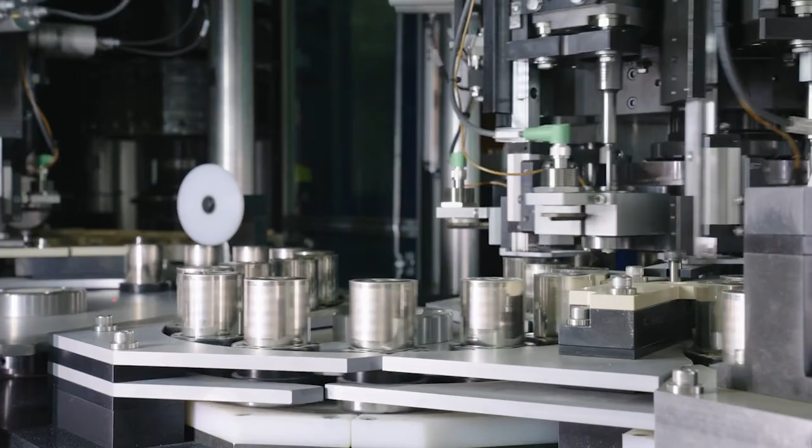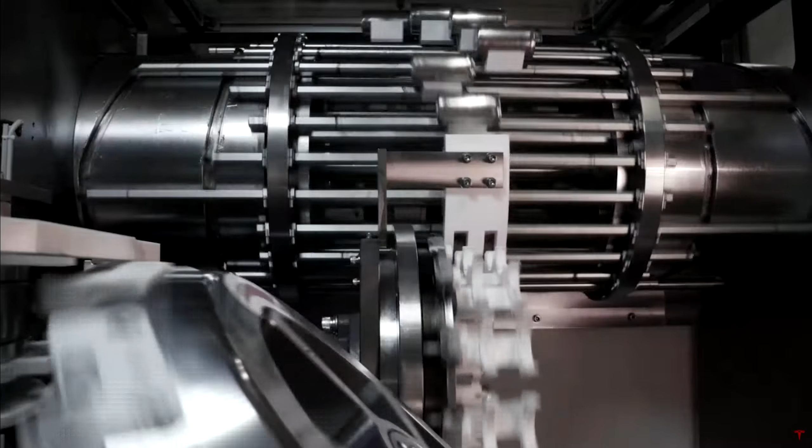After the We Robot event, Tesla hinted that the Cybercab will use 4680s. And at Battery Day, they hinted that it would use an LFP chemistry. Does that mean the Cybercab will use an LFP 4680 produced in-house by Tesla?

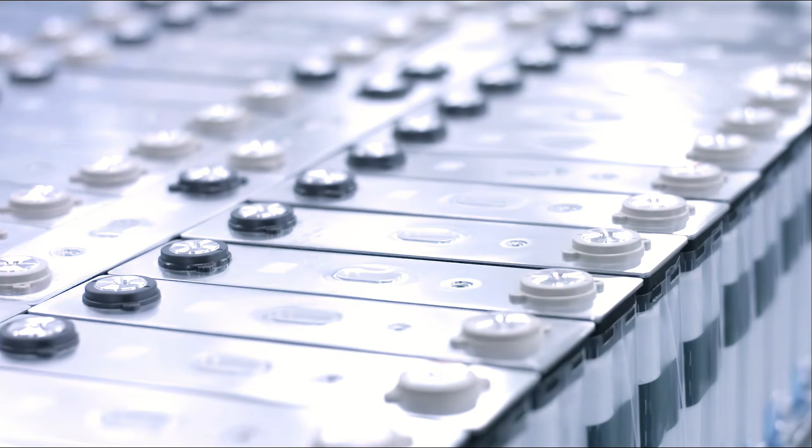Many would assume the answer would automatically be no, because LFP battery cells are known for having relatively low energy density. Due to that, EV battery packs always use LFP battery cells in a prismatic or rectangular form factor to squeeze in as much energy into the battery pack as possible. That is, an LFP 4680 battery pack could be one of the lowest energy density battery packs on the market.

However, an LFP 4680 battery pack would also have benefits. For example, among other features, it could end up being the lowest cost battery pack on the market, making it perfect for vehicles like the Cybercab.

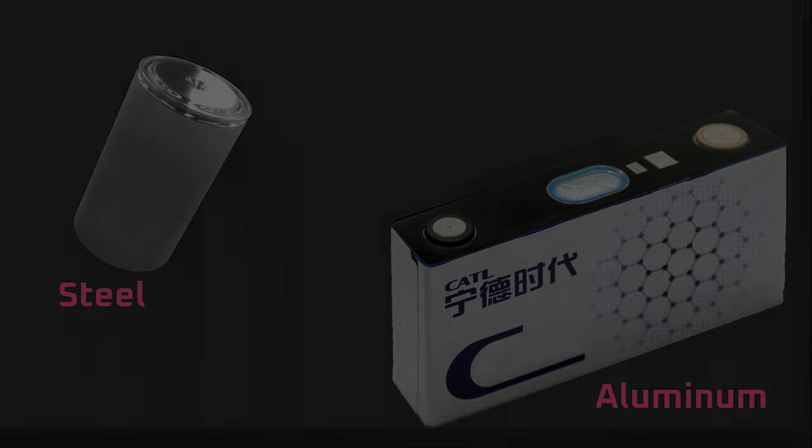So today, I'm going to make a comprehensive case for the LFP 4680.

First, regardless of form factor, what's the likelihood that Tesla produces a battery cell in-house that uses an LFP or iron-based chemistry? In short, it appears likely.

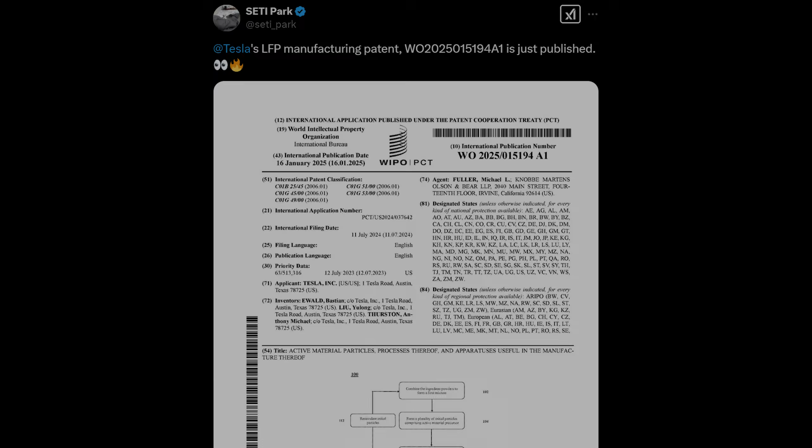A few weeks ago, the X account SETI Park discovered the patent application for Tesla's cathode production process, which included the production of LFP cathode material, which is the material that's used to coat the metal cathode foils that go into a lithium-ion battery cell.

I reposted that patent application with my own thoughts, and Drew Baglino, the former senior vice president of powertrain and energy at Tesla, responded. He said it would be prudent for LFP supply chains in the US and Europe to adopt the approach highlighted in the patent.

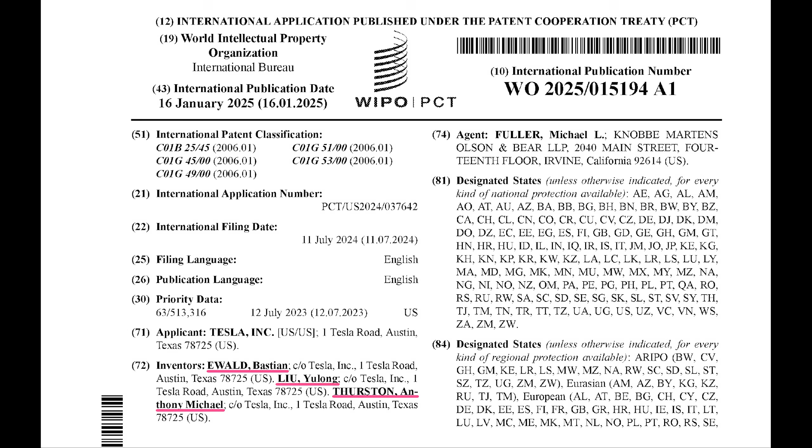That's because, fully scaled, it can produce LFP cathode material at a lower cost than it can be imported from China. That is, reading between the lines, it's likely that Tesla intends to use this process in their US cathode production facility. So I decided to look further into the patent, and started by looking up the inventors on LinkedIn.

One of the inventors, Yulong Liu, indicated that in the past 3 years Tesla has run 4 multi-ton pilot trials for LFP cathode material, and 1 production trial that was 100 tons, which, by my estimate, would be enough for several hundred vehicles. That is, it was a relatively large batch that would have been produced on commercial-scale production equipment.

That signaled to me that Tesla has a strong intent to fully commercialize in-house LFP cathode material production, and by implication, LFP battery cells.

So if Tesla produced LFP battery cells, what form factor could we expect them to produce? Prismatic or cylindrical? Let's take a look at the history.

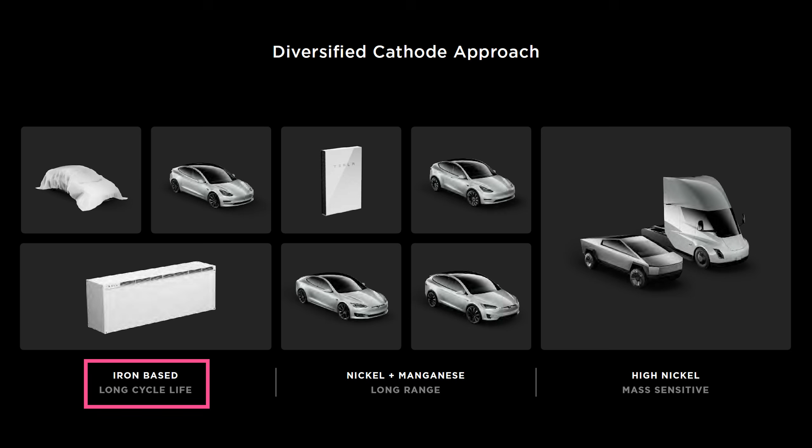Nearly 5 years ago at Battery Day, Tesla said that it would take a diversified cathode approach, and LFP batteries were part of that strategy. Notably, they never specifically said they'd make an LFP 4680, just that the LFP chemistry was part of their overall strategy.

Then, 3 years ago, in the Q4 2021 earnings call, Drew and Elon made several comments on form factor. Drew said, quote, 'Should everything be 4680? It doesn't have to be. In the end, it's about cost competitiveness and scalability of manufacturing. When you compare an iron cell with a nickel cell, there are some physics-based differences in what happens in certain corner cases that drive different form factors. So the 4680 isn't like the ultimate form factor for all things. There's other form factors that could be better for an iron cell, for example.'

End quote. And Elon followed up with, quote, 'Yeah, we don't use 4680 at all for the iron phosphate cells.' End quote.

Many people assumed that what Tesla was saying here was that they would never produce an LFP 4680 cell. My interpretation was that they were simply saying that they were currently using the prismatic form factor, but that when the time came for Tesla to produce their own LFP battery cells, they would look at the requirements of each use case and pick the form factor and chemistry that made the most sense. After that, there was 2 years of radio silence on the LFP 4680.

About 6 months ago, Steve Levine of The Information reported that Tesla planned on introducing 4 versions of the 4680 in 2026, including a workhorse cell for the Cybercab, as well as versions for the Cybertruck and Tesla Semi. An LFP chemistry would be perfect for a workhorse cell due to its high cycle life, and it would make sense to put the LFP chemistry in a 4680 form factor to make the ultimate workhorse cell. I'll explain why in a moment.

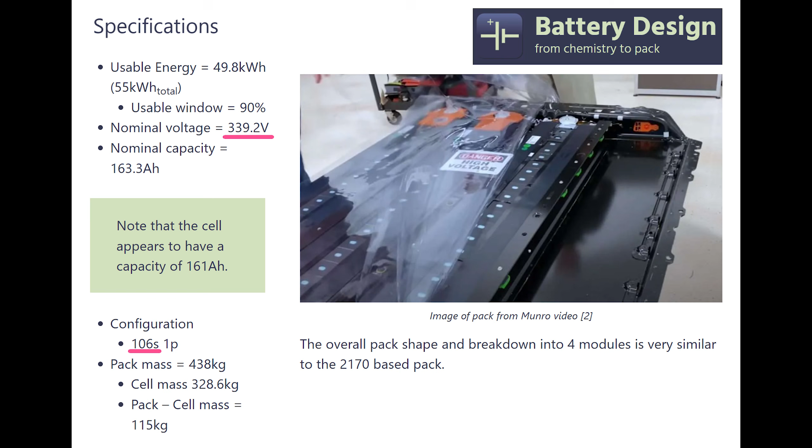As I covered in the Q4 earnings call video, the prismatic battery cells used in Megapacks are typically much larger than those used for EVs. 50 to 200 amp-hour cells are used for EVs, and 200 to 500 amp-hour cells are used for grid storage. On the EV side, smaller battery cells are needed so they can be wired in series to achieve the hundreds of volts necessary for charging. On the Megapack side, voltage isn't an issue, because a Megapack contains thousands of battery cells and the target voltage is around 400 to 500 volts.

Larger battery cells are better for Megapacks because it reduces the number of manufacturing operations to wire them in. This helps emphasize why Drew said in the Q4 2021 earnings call that not everything has to be a 4680. In the end, it's about cost, scalability, and the physics requirements of each use case. An EV battery has different requirements than a grid storage battery.

The question is, what form factor and chemistry is best for the Cybercab? The number one requirement for the battery pack will be its cost in dollars per kilowatt hour per cycle. The goal will be to use the cheapest battery pack available with the highest number of cycles, and an LFP 4680 could dominate in that metric.

That's because it would use the lowest cost chemistry, the lowest cost form factor, and the lowest cost manufacturing process. I'll elaborate a bit on each one of those.

With regards to chemistry, LFP battery cells are the cheapest on the market. It varies over time, but usually they're $10 to $20 per kilowatt hour cheaper than nickel cells and can easily hit 4,000 cycles as opposed to less than 1,500 or so for nickel. That means the cost per kilowatt hour per cycle of LFP cells is usually about 70 to 80% less than nickel cells.

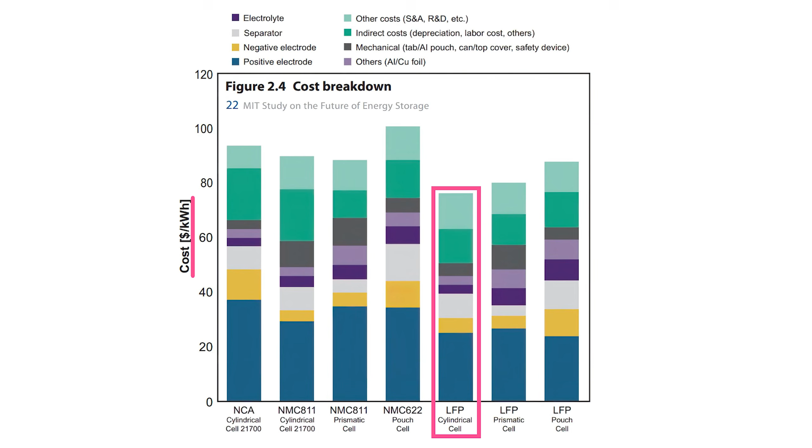With regards to form factor, cylindrical LFP cells are slightly cheaper to manufacture than prismatic LFP cells due to factors like cheaper packaging and safety mechanisms. With regards to manufacturing costs, Tesla's dry electrode coating process should be the cheapest on the market, but that depends on if they can successfully ramp that coating process for the cathode, which we're still waiting for updates on.

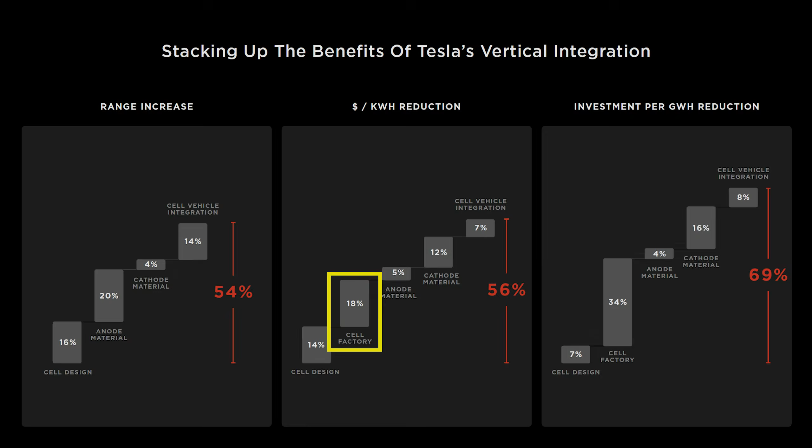What about the cost disadvantages of an LFP 4680? First, 4680 cells are smaller than prismatic cells, meaning more cells and therefore more welds would be required to make a battery pack. Second, China has a stranglehold on refined battery materials, meaning larger economies of scale and lower costs. Tesla's supply chain is still small by comparison, so Tesla may pay more for battery materials to build in-house cells than Chinese companies would.

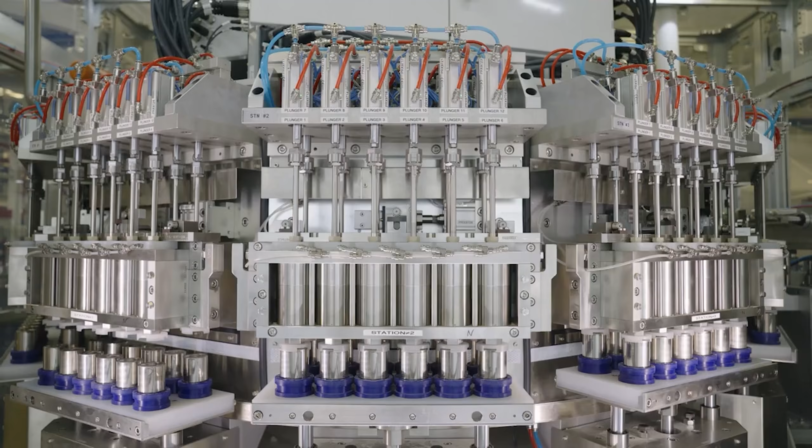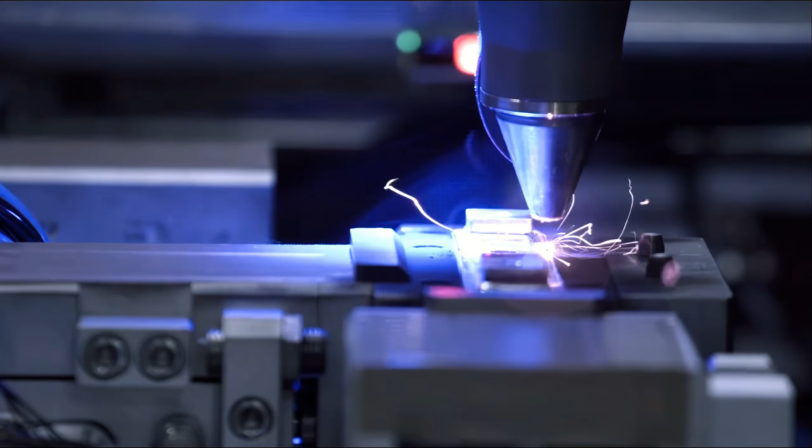That said, the extra cost from things like additional welding operations would be small. Tesla is vertically integrating their supply chain to reduce costs, and by using in-house cells, they wouldn't have to pay shipping, tariffs, and profit margins. There's a good chance that, all things considered, a Tesla LFP 4680 pack would be the cheapest EV battery pack on the market. And failing that, at the very least, they should be able to produce LFP 4680 packs cheaper than they could purchase comparable battery packs using prismatic LFP cells from China.

Besides the cell and pack costs in terms of dollars per kilowatt hour per cycle, what about other battery-related costs that might affect the lifetime cost of an EV? Some might argue that in the long run, Tesla would be better off using nickel-based battery cells because they would have higher energy density and therefore weigh less and increase the efficiency of the vehicle.

The assumption would be that nickel batteries would be less expensive over time because they would use less electricity. Is that true? Not as far as I can tell. Currently, nickel packs cost about $20 per kilowatt hour more than LFP packs. And as I showed earlier, they also have much lower cycle life.

Which means LFP cells have a cost per kilowatt hour per cycle that's about 70 to 80% lower than nickel cells. But what if the nickel cells could match the cycle life of the LFP cells? It is possible, but it would add to the cost because they would require higher grade materials. But let's say Tesla could produce a high cycle life nickel cell for the same cost as a standard nickel cell. What would the lifetime cost, including electricity, look like for LFP versus nickel cells that each have the same cycle life? On screen are some back-of-the-napkin calculations using a Cybercab as an example.

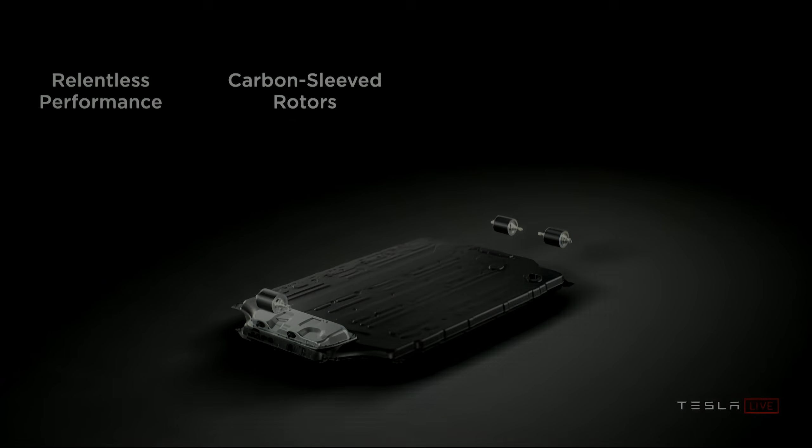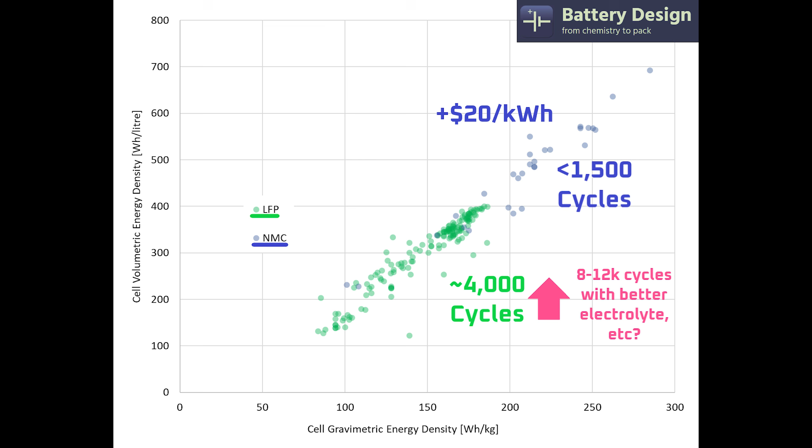The upshot is that a nickel battery pack would save about $715 of electricity over the life of the vehicle, but the cost of that battery would be about $720 more than an LFP battery pack. Yes, there are other potential cost savings with a lighter weight nickel pack, such as smaller motors and lighter weight suspension. But on the other hand, Tesla could potentially use the same technology toolkit used in high cycle life nickel cells to make their LFP cells last several times longer as well, lowering their cost per kilowatt hour per cycle even further than it already is.

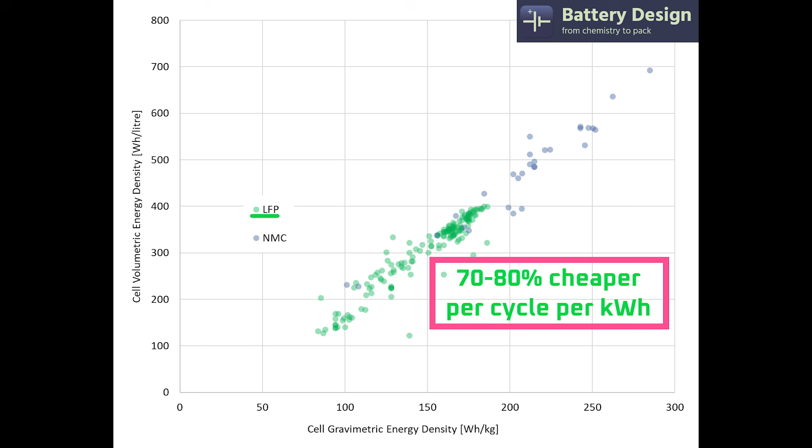It's not obvious that there would be cost savings with a nickel pack, and if there is, it would probably be small. So I'd say the simplest solution is the most likely, which is to use tried and trusted LFP packs for the Cybercab rather than high-end nickel-based packs. And that's not even taking into account the other benefits of LFP battery packs. More on that in a moment.

As a final note on cost, proponents of nickel cells might also argue that they would have a higher recycling value than LFP battery cells, which would reduce the lifetime costs and reduce the cost of nickel battery packs in the future because recycled materials are cheaper. In my view, it won't work out like that. That's because recyclers will probably have to pay more for battery packs that contain nickel, and because the recycled nickel will be sold at the market price of nickel in general. That is, nickel is fundamentally more expensive than iron because iron is orders of magnitude more abundant.

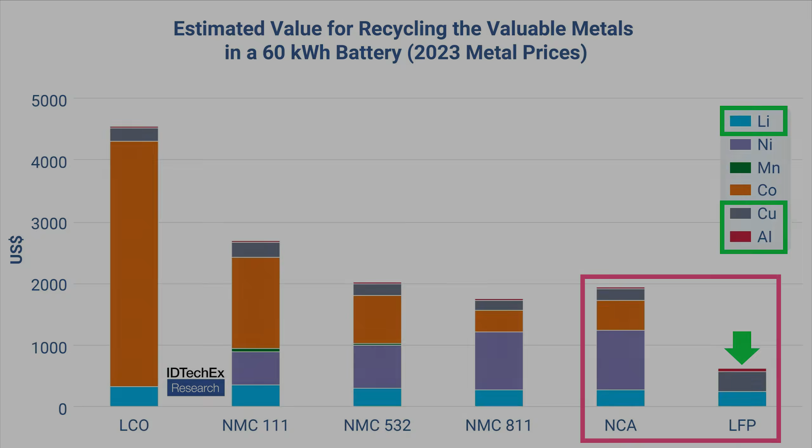Not only is iron cheap, but LFP cathodes are also non-toxic. That means you can throw away an LFP battery pack at the end of its life and have fewer concerns about toxic materials leaching into the environment. With that said, LFP batteries will still be recycled to extract the valuable copper, lithium, and aluminum. That is, for the most part, just like nickel packs, it's unlikely that many LFP packs will end up in a landfill. This brings up another reason why Tesla would choose LFP over nickel cells.

Almost all of the raw materials that it would use are readily available, or will soon be readily available from within the U.S. or U.S. allies and trade partners at low cost and high volume. That's because Tesla now has their own cathode plant and will soon have their own lithium refinery, so they can bypass most of the Chinese supply chain. The only piece of the puzzle left to vertically integrate is graphite refining, and in the next few years, I expect Tesla will do just that, or at least partner with a company to produce graphite in North America.

That's because if Tesla plans on building millions of Cybercabs per year in North America, with the current geopolitics, it would be a poor strategic move to be overly reliant on the Chinese supply chain for what will be one of their most mission-critical and profitable products ever.

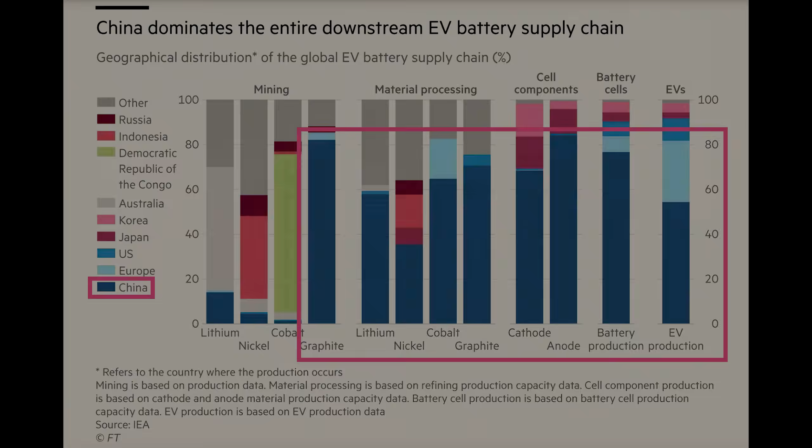As a final note on nickel versus LFP battery cells, interestingly, there is a chance that Tesla could incorporate a dash of nickel into their LFP battery cells. That's because Tesla recently published a patent application on a hybrid cathode that has surprising benefits. As Battery Bulletin explains, by adding a small amount of mid-voltage cobalt-free nickel cathode material to LFP cathode, say 10%, it could increase the cycle life of the battery cells without adding much cost.

My guess is 2 to 3%. The resulting higher cycle life and negligible cost increase would result in a battery cell that has a lower cost per kilowatt hour per cycle than a typical LFP battery cell.

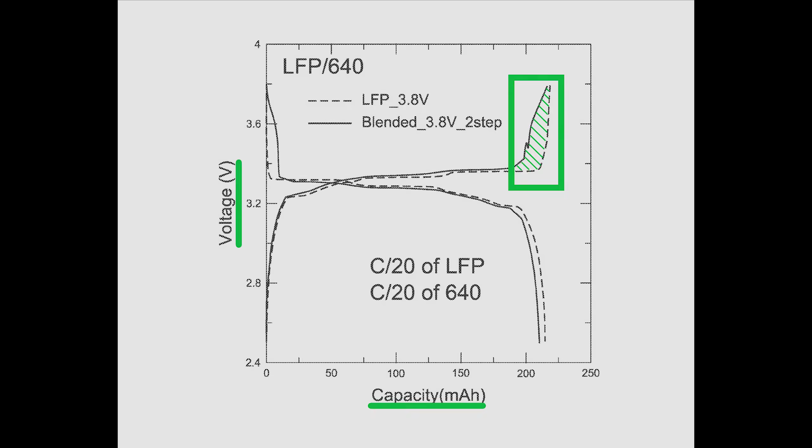For those wondering, yes, it would also slightly increase the energy density, but the effect would be minimal. I haven't read through the patent yet in detail, but based on this image, it looks like it would be maybe a few percent. While that would be useful, as this image shows, the main benefit of the hybrid cathode would be the increase in longevity, which is dramatic.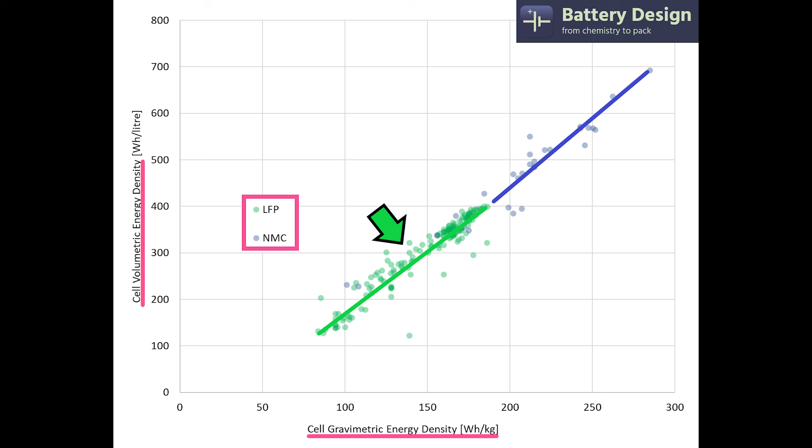While we're on the topic of energy density, what kind of energy density and range could we expect out of an LFP 4680? As I mentioned at the beginning of the video, the main argument against an LFP 4680 cell is that it would have relatively low energy density.

The image on screen was provided by Nigel Taylor of BatteryDesign.net for the energy density of dozens of LFP and NMC prismatic cells. That is, controlling for form factor, it gives us an idea of the difference in energy density between LFP and nickel battery cells. NMC prismatic cells reach about 285 watt-hours per kilogram, whereas LFP prismatic cells max out at around 186 watt-hours per kilogram.

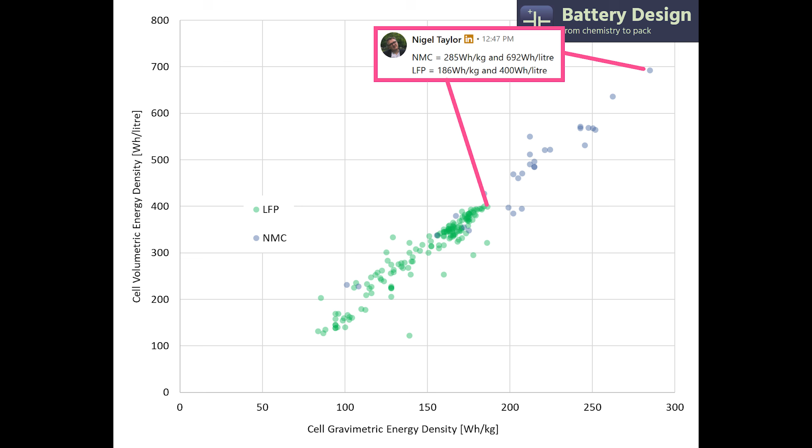Let's say that more realistic figures for usable energy density would be, respectively, more like 260 watt-hours per kilogram and 165 watt-hours per kilogram. That's a ratio of 0.63 for LFP to NMC.

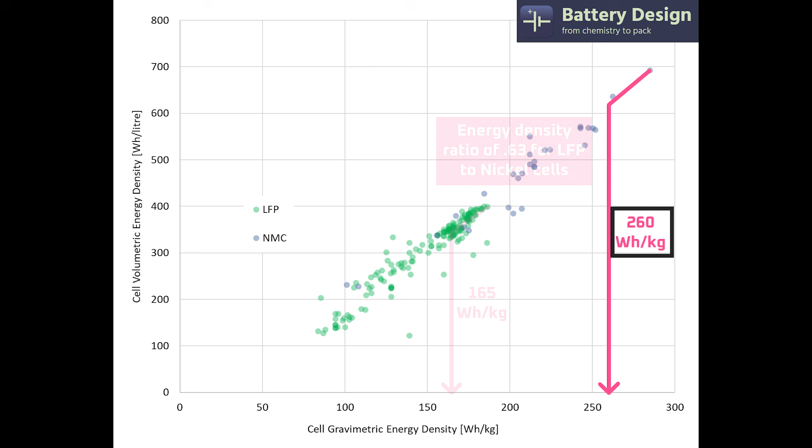Now that we've controlled for form factor using prismatic cells, let's apply that ratio to cylindrical cells. Cylindrical cells, such as the Generation 2 4680 and Panasonic 2170, have a usable energy density of 259 and 260 watt-hours per kilogram, which roughly aligns with the 260 watt-hour per kilogram usable energy density figure I estimated for a prismatic nickel-based cell. That means in order to estimate the range of an LFP vehicle, we just have to multiply the range of a vehicle that uses 4680 or 2170 cylindrical cells by 0.63.

Starting with the Model 3 that uses Panasonic 2170 cells, that vehicle has an EPA range of 363 miles. 0.63 times 363 is 229 miles of range for a hypothetical Model 3 that uses LFP 4680 cells. In my view, that's sandbagged and a worst-case scenario. Why? Let's take a look at another comparable, the Cybertruck.

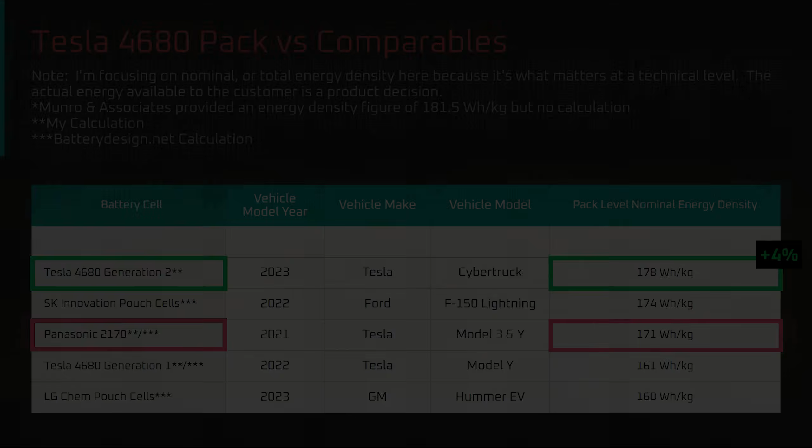The Cybertruck uses Generation 2 4680 cells that have a similar energy density to the Panasonic cells in the Model 3. But the battery pack it uses has about 4% better energy density than the Model 3 battery pack. Furthermore, the Cybertruck battery pack is overbuilt and ruggedized compared to the battery pack in the Model 3. I'm not sure how much that would be worth in terms of energy density, but let's say 2%.

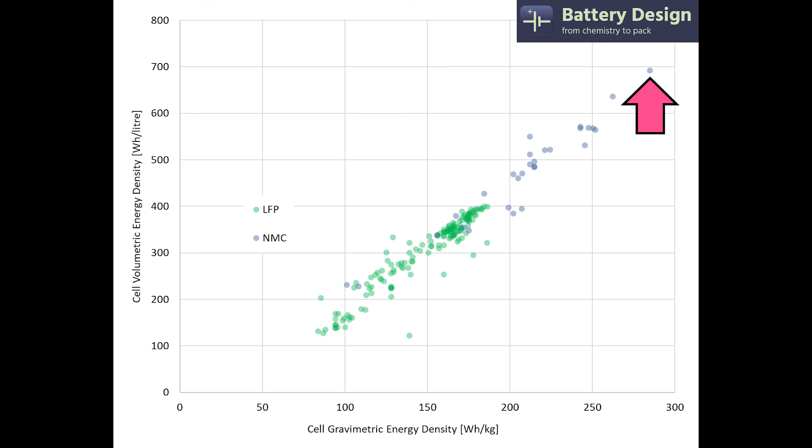Third, my understanding is that the NMC cell used as a comparison in this image from BatteryDesign.net contains silicon. That's as opposed to the Generation 2 4680, which didn't use silicon, meaning it was handicapped compared to the prismatic cell comparison. Let's say the silicon is worth about a 9% energy density increase. If we adjust for all those factors, it means we could likely add about 15% to the 229-mile range of an LFP 4680 Model 3 to reach 263 miles of range.

Let's take a look at other Tesla vehicles. For the Cybertruck, an LFP 4680 might barely eke by. The longest-range Cybertruck currently has 325 miles of range. If we multiply that by 0.63 and adjust for the silicon factor I mentioned above for a 9% increase, the range would be about 223 miles.

But, of course, the standard-range Cybertruck will have fewer motors than current versions. It may have different tires, and Tesla might also be able to squeeze in a few more 4680s into the Cybertruck pack. So it is possible the Cybertruck could use an LFP 4680, but it's not a shoo-in.

Moving on to the Semi, the LFP 4680 could easily provide the 300 miles of rated range for the shorter range version. That's because the current Semi has about 500 miles of rated range. And even using the bearish 0.63 ratio above, that would mean 315 miles of rated range.

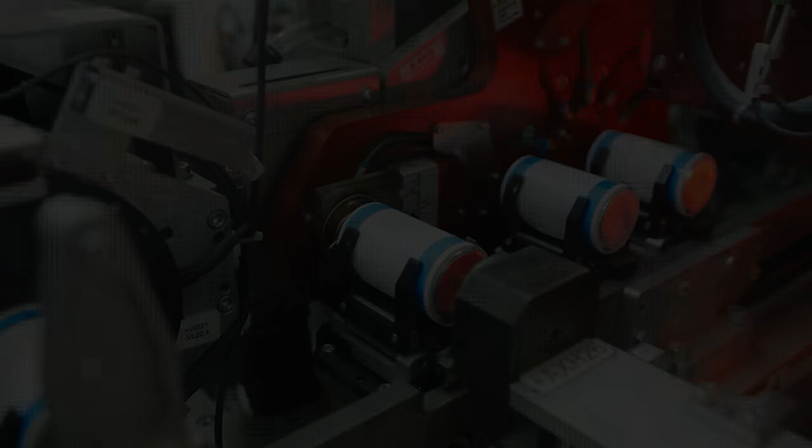Before I close out the video, let's look at some other perks of an LFP 4680 cell. First, LFP is inherently cobalt-free, meaning it has fewer public relations issues than nickel batteries, which use cobalt for stability. Second, an LFP battery pack using a 4680 cell could end up being the safest EV battery pack on the market. That's for three reasons.

First, LFP cells are lower energy density than nickel cells, meaning less energy to contain for a given weight or volume. Second, 4680 cells are much smaller than prismatic cells, which should slow the spread of fire through the battery pack because there's a higher ratio of inert material to energy storing material. Third, prismatic cells are usually made from aluminum, which has a much lower melting point than the high-carbon steel that's used for 4680 cells.

The third perk of 4680 cells is that, although the higher proportion of non-active structural material in an LFP 4680 pack results in lower energy density, it also likely means greater structural rigidity than a typical LFP prismatic pack, which potentially means less structural reinforcement is required around the battery pack. That would mean slightly less weight and potentially more range than expected.

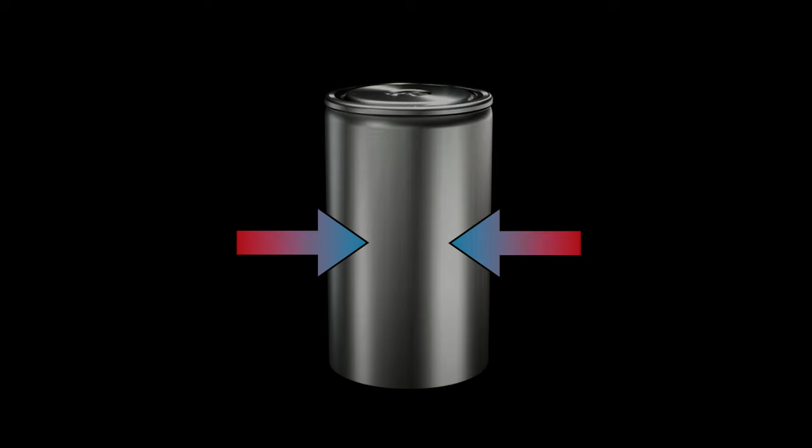Fourth, it's easier to control the temperature and temperature gradient of smaller battery cells, which means an LFP 4680 pack may last longer than a prismatic LFP pack. Fifth, LFP cells are more durable to a 0 to 100% duty cycle. That means even though LFP packs store less energy and therefore have less range than nickel packs, more of their energy capacity can be utilized each day without a serious impact on overall battery life. That means for commercial use cases, in terms of real-world usage, LFP batteries end up having more like 15% less range than nickel packs, rather than 30% less range.

In summary, an LFP 4680 battery pack appears to be not only viable, but could potentially be the lowest cost, safest, and most durable battery pack in the automotive industry. Although the range an LFP 4680 provides might be mediocre, that wouldn't be the priority for a workhorse-type cell. For vehicles that require more range and less durability, Tesla can use higher nickel cell chemistries.

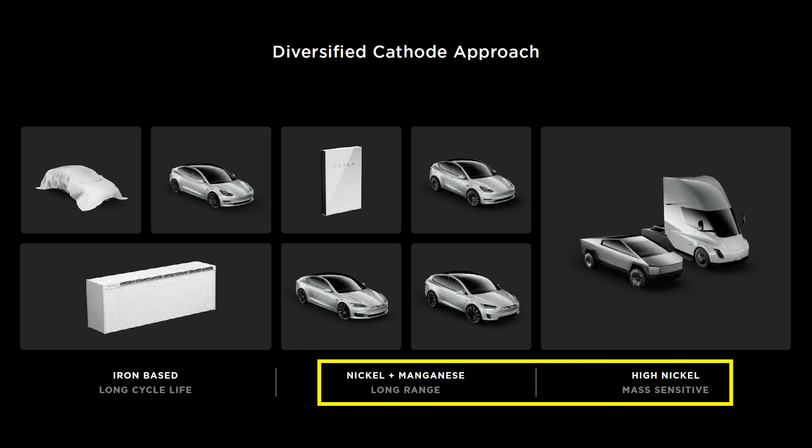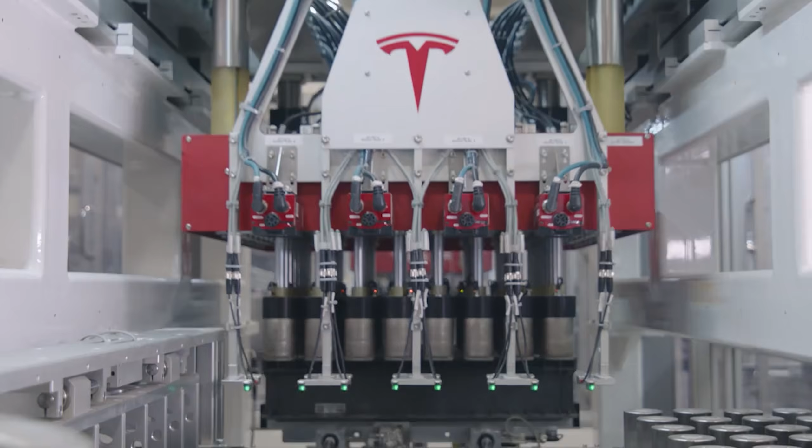As for when we could see an LFP 4680, I've been saying for about 5 years that it's at least a couple years away. But now, if everything goes well with the ramp of nickel-based 4680 cells this year, I'd say that it's now likely that we see the LFP 4680 next year. If Tesla does continue to run into issues with that production ramp, they could use third-party prismatic LFP packs or nickel-based 4680 packs in the Cybercab temporarily. But that wouldn't make sense to me in the long run.

If things go very well, which I'm not holding my breath for, they could use the LFP 4680 in a short-range version of the Cybertruck by the end of this year. But I view that as unlikely.

As always, I could certainly be wrong here about Tesla's plans for an LFP 4680, but all the information I see is pointing in that direction. Let me know what you think in the comments below.